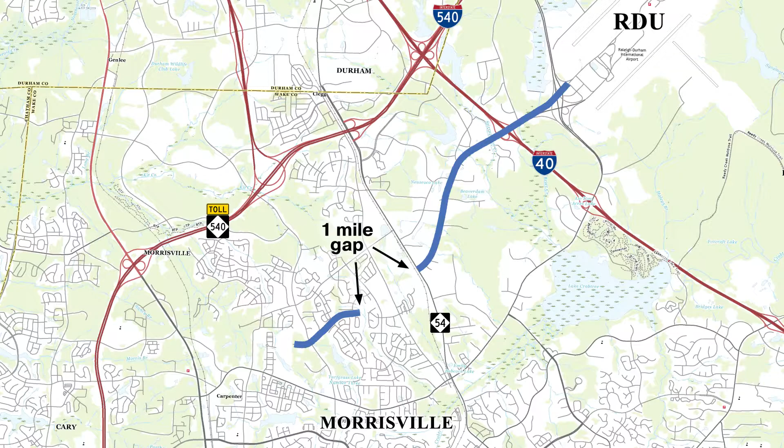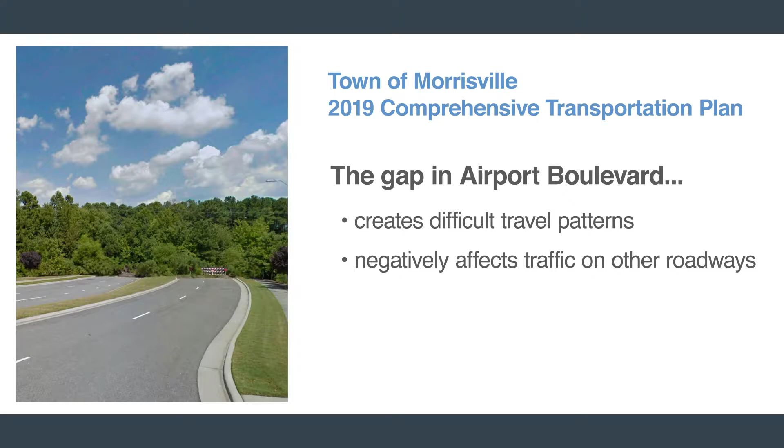The project is identified in Morrisville's 2019 Comprehensive Transportation Plan. The plan describes Airport Boulevard as one of the town's strategic corridors for accommodating rapid growth and one of Morrisville's gateways from Interstate 40. The plan also describes how the existing gap in Airport Boulevard creates difficult travel patterns, which negatively affects other area roadways. There are two main purposes for pursuing this project. One is to enhance connectivity between Chapel Hill Road and Davis Drive. The other is to improve multimodal traffic mobility on the local roadway network, meaning mobility not just for cars and trucks, but for pedestrians and bicycles as well.

In addition to Morrisville's plan, both phases of the project are included in the Capital Region's Metropolitan Transportation Plan. The town of Morrisville has received federal funding for Phase 1 of the project from the Capital Area Metropolitan Planning Organization as part of the Locally Administered Projects Program. The town has entered into an agreement with NCDOT to manage the project's environmental study and engineering.

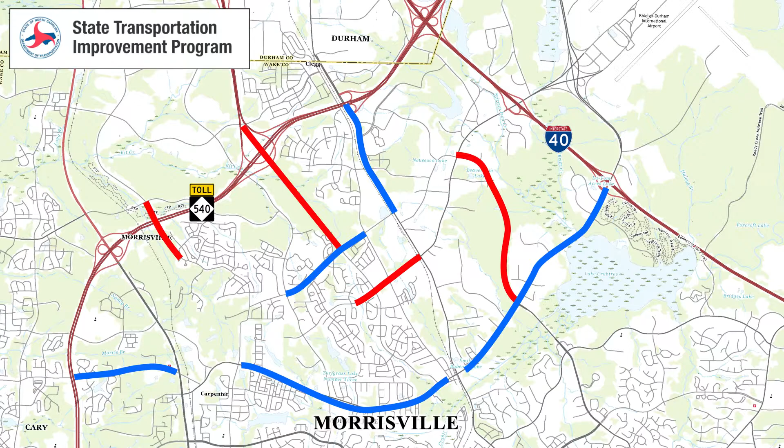The NCDOT's State Transportation Improvement Program, or STIP, includes the Airport Boulevard project, along with several others in the area. Some of these projects are for new roadways. Others are meant to widen or upgrade existing roads. The STIP also includes projects such as adding sidewalks, new transit routes, and other types of projects which are not shown here. For more information about these projects, you may contact the NCDOT Customer Service Center. Contact information is shown on the Airport Boulevard brochure, which is available on the NCDOT website.

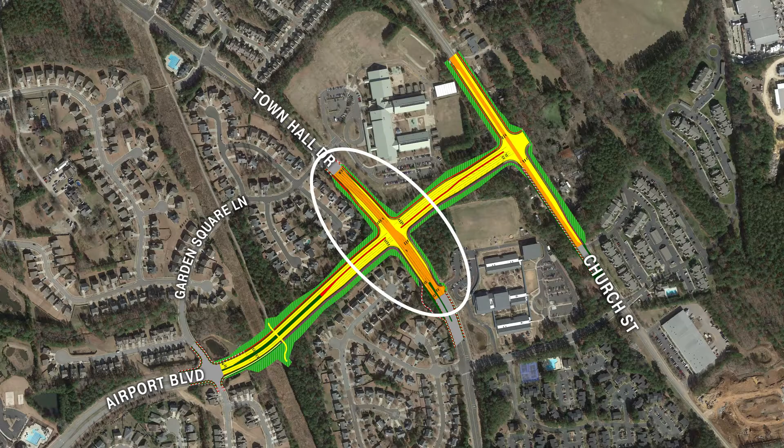We will now turn our attention to the project itself, describing the roadway alternatives and their expected impacts. We'll start by looking at Phase 1, from Garden Square Lane to Church Street. This image shows the basic design drawing for Phase 1 placed over an aerial photograph. The project follows a corridor that was set aside several years ago. To accommodate turn lanes to and from this new section of Airport Boulevard, the project will also require improvements at Town Hall Drive and Church Street.

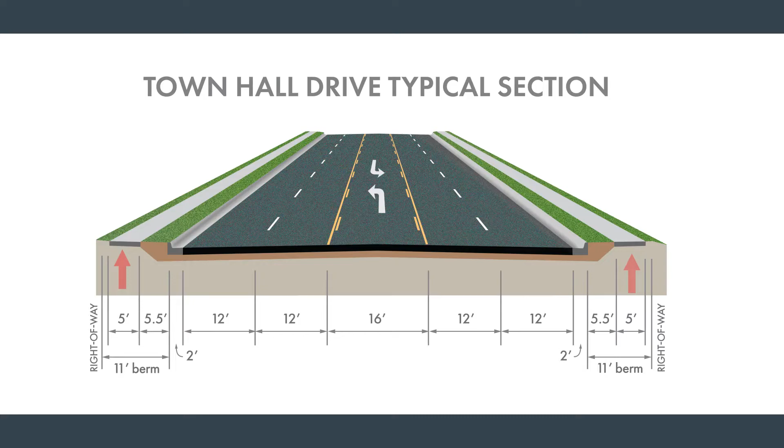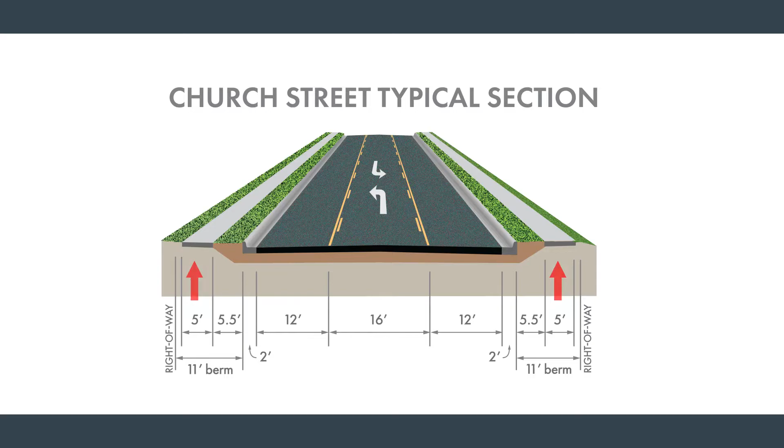And where Church Street crosses the project, the design would have one 12-foot lane in each direction, a 16-foot wide continuous left turn lane, and 5-foot sidewalks on both sides.

The expected impacts of the Phase 1 project include 480 linear feet of stream impacts, 0.3 acres of wetland impacts, small strips of land or easements from 39 parcels, one residential relocation, and a total of 1.9 acres of land to be acquired.

Phase 2 of the project extends from Church Street to Chapel Hill Road. Because this phase is not currently funded for land acquisition or construction, the design is preliminary. There are two alternative routes under consideration for this phase.

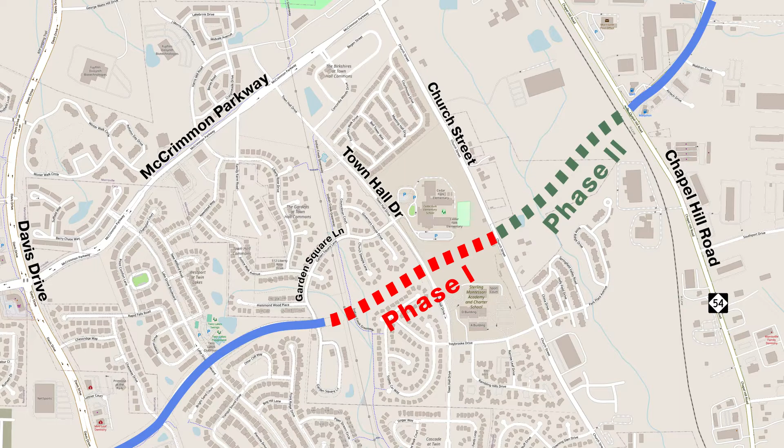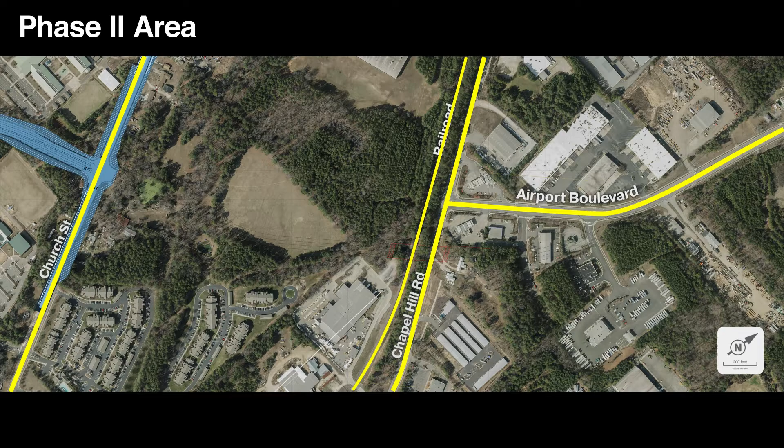This is the other alternative being considered, Alternative 2. It would also require a bridge over the railroad tracks and Chapel Hill Road, but it would not line up with the existing Airport Boulevard. Instead, it would be shifted to the east.

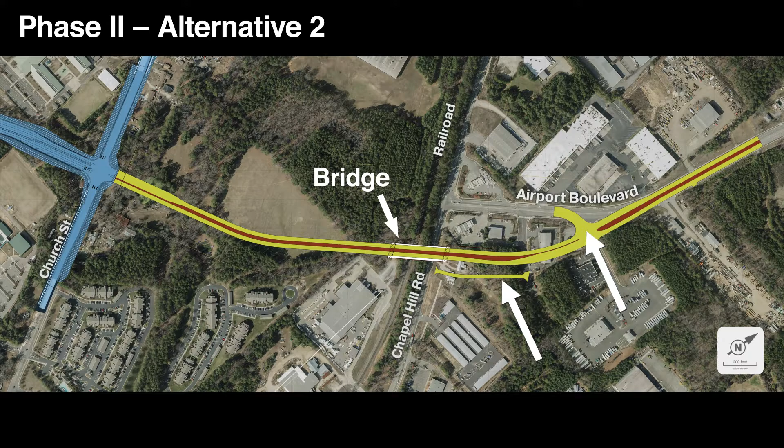This shift would only require a small service road that would connect to the existing AirTech Drive, along with a small length of pavement to reconnect to the existing Airport Boulevard. It would, however, require two businesses to be relocated. The Phase 2 project would have the same basic design for Airport Boulevard as the Phase 1 project shown previously.

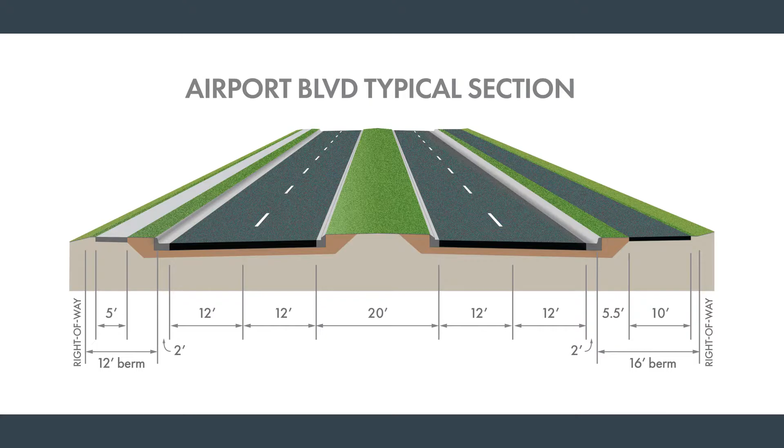A preliminary impact assessment has been conducted for these two alternatives. Both alternatives would have a small effect on wetlands and surface waters, in no case more than 0.4 of an acre. Stream impacts would be greater with Alternative 2. The number of parcels affected are nearly the same for both alternatives.

While both would require two residential relocations, Alternative 2 would also require two business relocations, as mentioned previously. Alternative 2 would also require more overall land acquisition.

We'll now take a moment to discuss other improvements associated with the overall project. The term complete streets means that a street or highway project is not considered complete until different types of transportation, other than cars and trucks, are studied and implemented when warranted. This can mean such things as including sidewalks, bike lanes, bus turnouts, or other improvements to mobility.

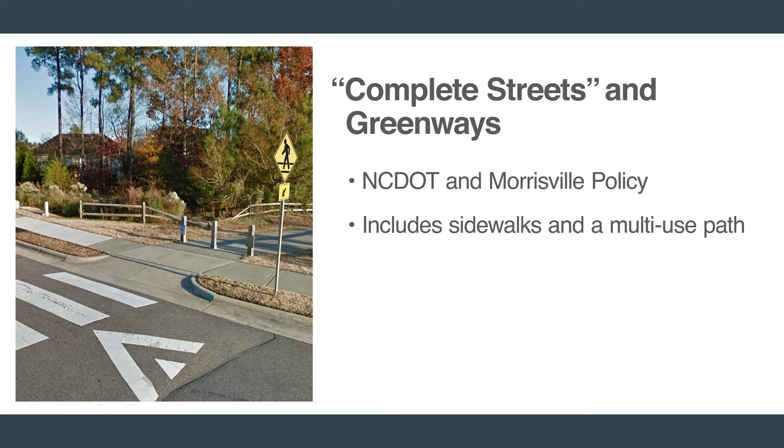It is the policy of both NCDOT and the town of Morrisville to incorporate these kinds of features into all projects when warranted. On this project, both sidewalks and a multi-use path are proposed along the new roadway. In addition, there will be an at-grade pedestrian crossing where the Indian Creek Greenway would cross the new Airport Boulevard.

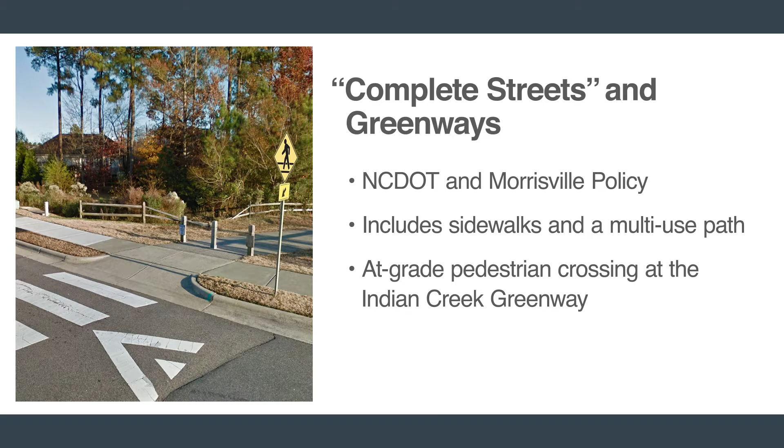The proposed schedule calls for the current environmental study to conclude in the late summer of this year. Assuming no significant environmental or community issues arise, right-of-way acquisition for Phase 1 is expected to begin late this year, with construction beginning next summer. As previously mentioned, the Phase 2 project is currently unfunded for any activities beyond this study.

It is important to remember that the alternative to not build the project, the no-build alternative, remains under consideration. It is only after the environmental documentation for this project is complete that a final decision can be made about whether the project should continue.